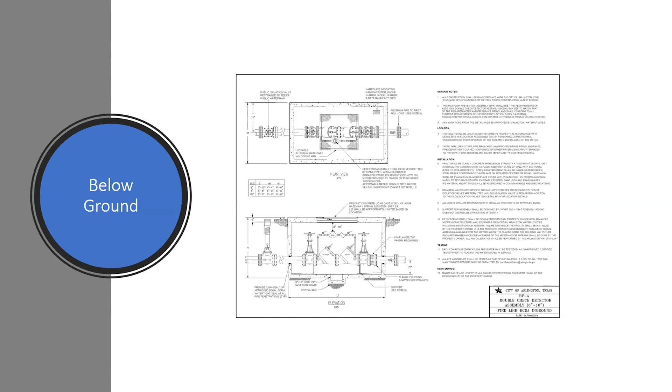So I thought your point of view is interesting because, for most of your new commercial installations, you guys enforce RPZ and above ground. And I see that all across the country. That's one of the big points of my presentation, just about everywhere in the country is going to that. We call it the rise of the RPZ, for several factors, but mainly because it's better protection for your water supply. And you as a municipality, that's your water. You've got to protect it. So I see that just about everywhere.

But like in a lot of cases here in Arlington, we don't know what the end user is going to be of that facility. So it's better to go ahead and have the highest protection that we can to protect our public. Exactly right. The guy who's an office building today, 10 years from now, he's the cyanide manufacturer. So better to just go ahead and put that RPZ in. But I did think it was interesting that you do allow vaults, but like you said, mostly for fire protection. So you're having double checks and double detectors going in vaults.

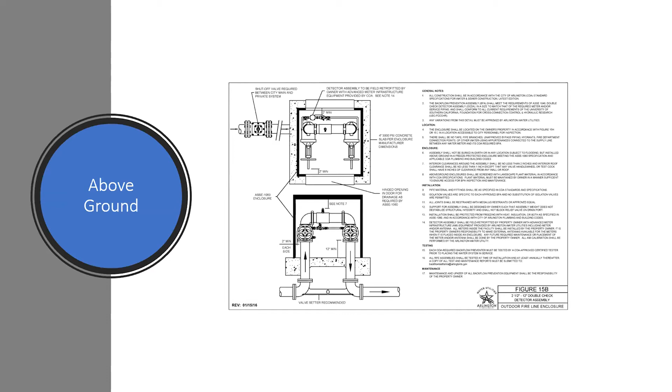In both fire and irrigation, the state deems that as a low hazard protection. So that's why we're still doing those double checks. Of course, if there's any chemical added, then it would be an RPZ required. Gotcha. That's also an interesting point because it's kind of rare to have irrigation considered low hazard. But anyway, that's interesting stuff.

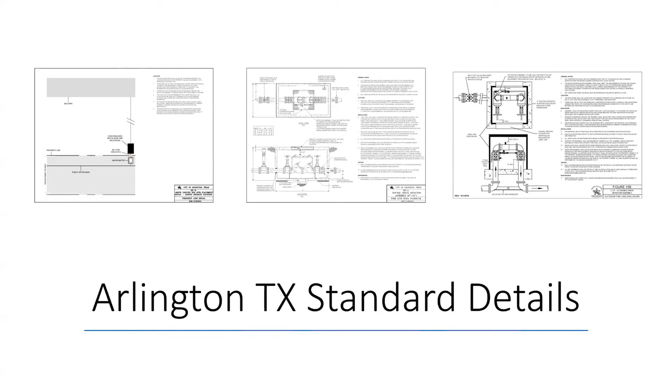Christopher, what's kind of going on there in Virginia? Similar standards? Very much so, yeah. Typically in Virginia, we have the high health hazard, which is going to require the RP. Low hazard, of course, you can allow a double check. And if it is a double check, that's the only one allowed below grade. So in the 3, domestic, fire, and irrigation, for your domestic, there's some jurisdictions that will allow a double check on a domestic line.

There are some jurisdictions that are pretty much reduced pressure RP assemblies across the board, with a few situations where they will allow you to go back to a double check, in the case of a fire system. Of course, lawn irrigation is high health, so it's going to require an RP or a pressure vacuum breaker. And of course, neither of those can go in vaults.

So in short, if you've got a vault, you should have a double check or a double detector only. And those are typically going to be 90% fire. I have a few in some of the municipalities that are wash downs that they've allocated as low hazard, and so they've got double checks in the pits. Gotcha.

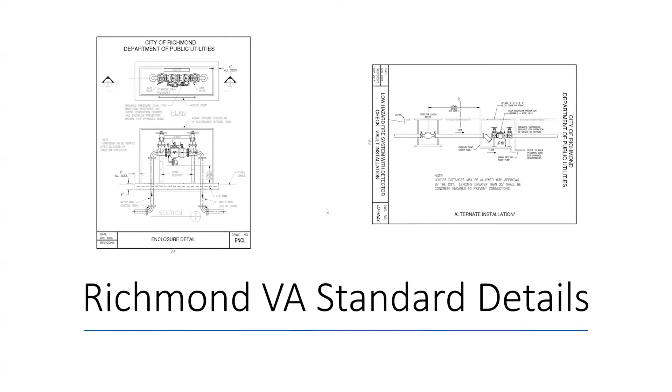One rule is that I do not go into vaults by myself. Not that I have to have somebody else in the vault with me, but I'm not going to be on station by myself. So that requires me to have an additional employee with me or a member of the property, whether it be an engineer or a municipality utility worker or whatever the case is. Gotcha.

First of all, we inspect all of them, and I'll tell you, my experience is all vaults flood, and there are very few of them that I get to that we don't have to pump out. The picture you're showing here is a prime example, and I don't pump water. That's not part of my job as a backflow tester. So the owner or the municipality or whoever I'm doing the work for has got to have a crew there. They've got to have a submersible pump and be able to pump it down to where I can get down there. I'm not afraid of standing in water by any means, but I'm not standing in knee-deep water to test a backflow.

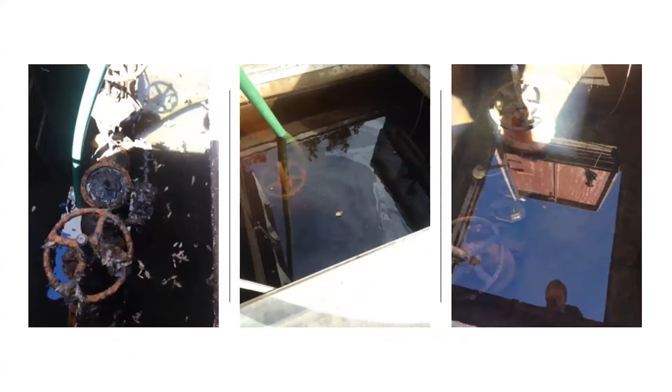And of course, with that is additional cost. Your test costs are going to be higher. It's going to cost you more for me to come out and test one in a vault, especially if it's flooded, than it will to test one above ground. We've got to have the assets. We've got to have a pump. We've got to have a crew. We've got to pump it out. Then I'm going to get down there. Of course, I'm usually standing there waiting for it to get pumped out, and you're going to typically pay me for my time. So it will generally cost a little bit more for me to test a vault than it does to test anything above ground.

And then hazard-wise, you've got your slips and falls, your vaults that have been dirty, wet. They've got scum on the steps. Of course, you've got critters. Don't forget your critters. Always spiders. You've got to love your critters.

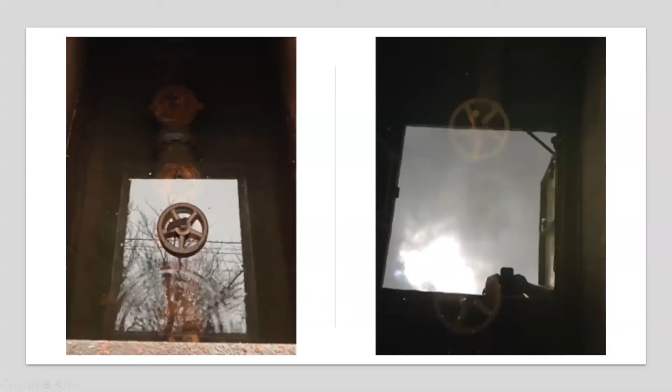And not even to get into the argument of confined space entry or permit entry. That keeps coming up. None of the jurisdictions that I work in here in Virginia have permit-required entry for their vaults. A lot of them aren't really sure whether they should be permit entry required or not. Of course, they are confined spaces. There's no question. By the definition in OSHA, they definitely are confined spaces.

But there again, when I open them up, I take my time. We don't use sniffers or anything like that, but I do open them up and give time for the critters to move around. If we've got to pump them out, we wait to get them pumped down. And then when you're going in and out of them, you just have to be careful. And unfortunately, I don't get around as good as I used to. None of us do. Yeah, so it's a little bit more of a task some days. Some days the knees don't work as good as others, and so you're dealing with that.

So again, it's maintenance-wise, cost-wise. If somebody were to sit down and run some numbers, you could probably start to see over the lifetime of a vault where you could definitely have a return on investment by having it above ground and in an enclosure.

Again, I got 2 utility guys with me pumping the vaults out. I'm standing there. I do charge my customers more because I know I can't show up and just test one in 10 minutes. It's going to take a while. So the cost, and of course, by the pictures you're showing here, everybody knows the ball valves degrade, the valve handles degrade when these things are exposed.

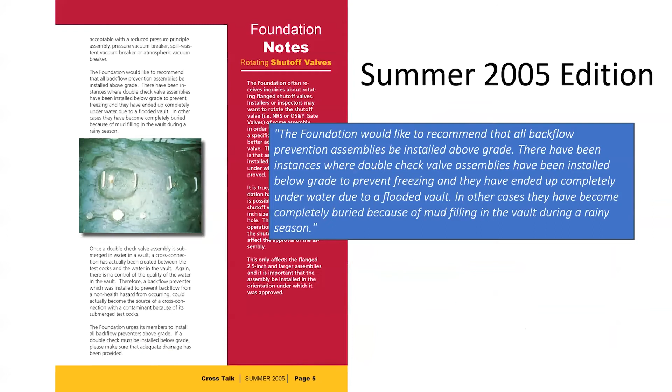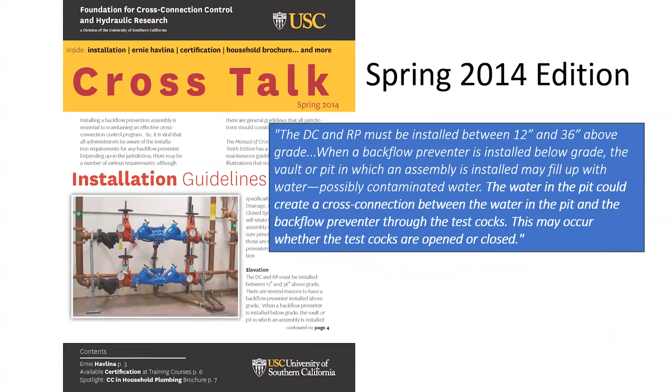University of Southern California dictates that if the test cocks are submerged, that's considered a cross connection, whether they're open or closed. So you look at those pictures, and you've got basically 4 cross connections every time the water gets at or above the test cock locations. So I'm looking at those pictures, and I could count 4 cross connections. And if we go back to the Safe Drinking Water Act, the EPA states that we shall not have cross connections. So that's kind of my take on the vaults.

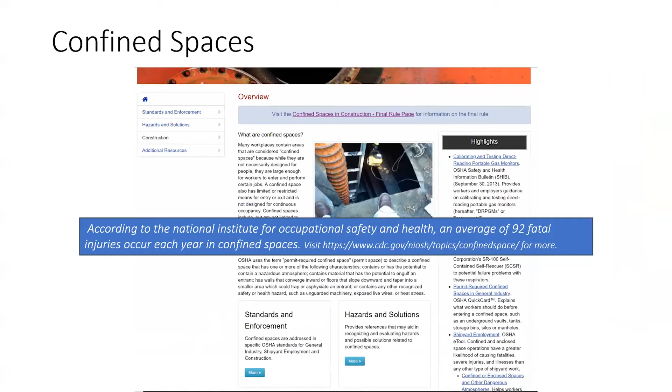Very good info. We appreciate that, Chris. Like you said, OSHA does classify it as a confined space. So if you were following all the OSHA confined space rules, you would have to have a sniffer and an extra person and a tripod and all those other things that OSHA requires. I was down at the ABPA convention a couple weeks ago down in Orlando and talked to a guy named Jeff Smith. And all he does is sell confined space safety equipment. That's it.

And his 4 main precautions when entering a confined space are gas detection, fall protection, ventilation, and communication. So you got to have something for all of those 4 things before you even think about getting down in there. So to your point, it costs a lot more to maintain a backflow installed in a vault. So good stuff, Chris. Appreciate it.

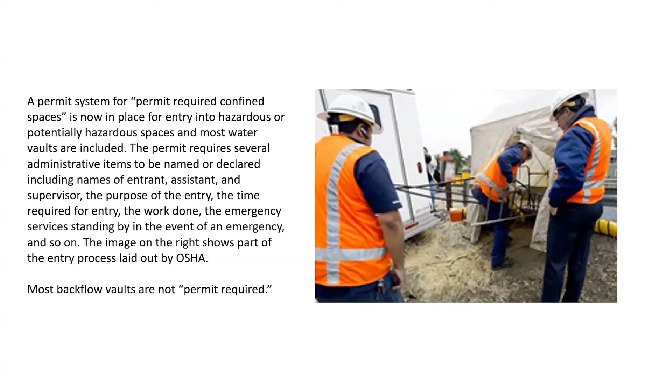We'll keep moving on. I wanted to direct a question to Sean at IAPMO. He's got a long history in this business as well. We kind of talked briefly about high hazard and low hazard applications. That's been language that I've heard my whole 20 plus years in this business. And I know everyone on the call is familiar with backflow, knows about high hazard and low hazard. But I wanted to get a historical perspective on that. Where did that kind of language come from?

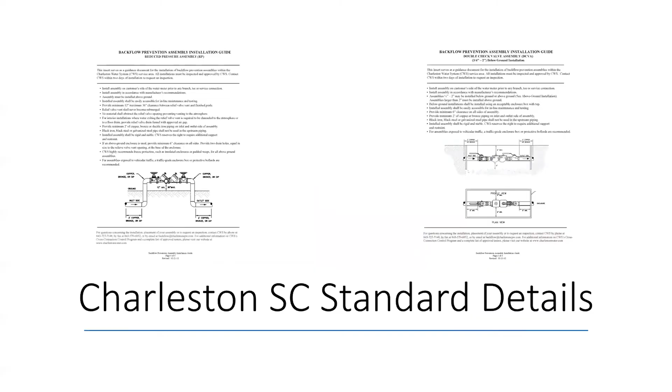Well, the language has been around in the codes for quite a while. We have 3 model plumbing codes in use in the United States, which would be the Uniform Plumbing Code that IAPMO writes, the International Plumbing Code that the ICC, the International Code Council, writes, and then the National Standard Plumbing Code, which is really only used in a little bit of Maryland and the state of New Jersey. But all of them recognize the high and low hazard classifications.

The low classification is something that will only affect the aesthetic quality of the water. And then the high hazard is anything that can make anyone sick or, God forbid, cause an illness to the point of death. So all of the codes have a standard written right into them that lays out which valves are used in which situations. One of the discussions you were having before was about irrigation systems. Irrigation systems are always high hazard because of the chemicals and everything else that people put on their lawns. So all 3 of the model plumbing codes, no matter where you live, are very clear that that would be a high hazard situation because a backflow incident could cause illness or death.

Now that language has been written into the code since the late 90s, early 2000s. So they've been through a number of code cycles where it's been made very clear there is a definite difference between high hazard and low hazard. And the code allows you to pick the valve that you need for the proper situation. We know that buildings can change usage, but the way the code looks at it isn't that everything commercial gets an RP and everything residential doesn't need anything. They're looking for specific usage and then the specific protection that's needed.

Because if you don't need an RP, you don't need that pressure drop, you don't need the issues we have with relief valve capacity and all those other things. So those are some different things to take a look at. The codes, when it comes to the actual vault installations, are very clear.

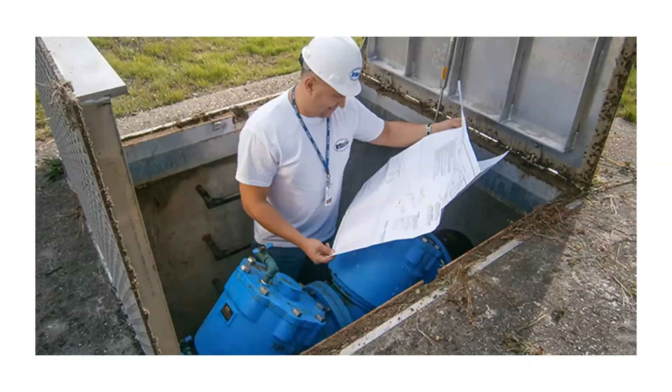You can't put a valve that has a relief valve or has an air inlet valve below grade. You can't put it anywhere where it could be submerged. Even if you go with this drain to daylight part, the ICC, the International Plumbing Code, says for accessibility we have to go with manufacturer's instructions. And Watts and Wilkins and Apollo are very clear that we don't put valves in pits or vaults. We don't put valves in there that have inlets. So that is pretty well taken care of. And because of the drainage capacity, it's something we really have to think about.

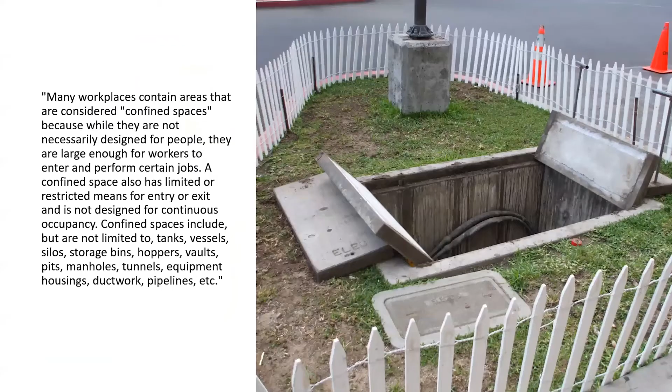Just about every picture that you've shown so far in this presentation is a permit required confined space. So it's crazy not to do air monitoring or harnesses or lifts or all those kinds of things when you're going into a confined space like that. You have no idea about algae blooms or anything else that could happen with toxic fumes in there. And we've had too many fatalities over the years in the industry as a result of issues like that. So it is important to understand that.

I agree with some of your other panelists who said it's more economically feasible for someone to put a valve in an enclosure because of the testing requirements and the safety requirements and the code compliance that you have with putting things in pits and vaults.

Excellent point. Yeah, I kind of started in the rep business, where you're talking to everybody all during the day. And as an inside sales guy at a rep firm, I would get calls from municipalities and engineers all the time saying, which backflow does this application need? Is this high hazard or low hazard? And I'm like, I don't know. I'm an inside sales guy. I've been here three months. I'm not qualified to answer that question.

Yeah, and like I said, in all honesty, there's a table in each of the three model plumbing codes that lists the hazards, lists the type of backflow, lists the protection that's required, and you can go right down it. Now, certain jurisdictions might amend the model codes because that's what they're for, but the model plumbing codes do a pretty good job of telling you what belongs where and how it should be installed. Okay.

That's good stuff. Okay, let's go back to Joe, since you're the municipal guy. Knowing the hazards and dangers of vaults, you and I have discussed those before. It's one of the reasons why your standard details are so clear on above ground installation. But do you think there's any time in the future where vaults would be outlawed or not allowed?

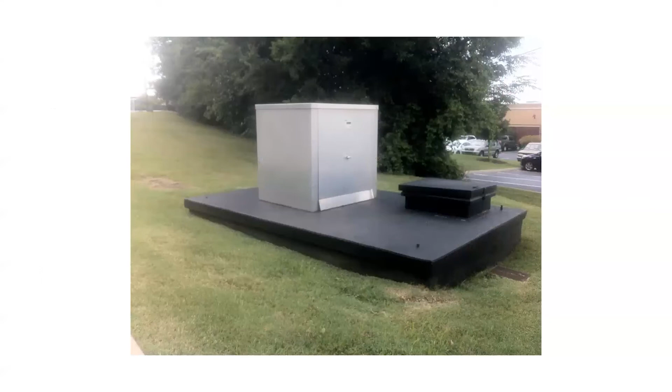If it ever goes to a high hazard status, obviously, then that would be the case for sure. Same thing kind of pertains to fire sprinkler systems and then irrigation as well. And that's kind of under review right now by the state, whether or not our irrigation systems will be deemed a high health hazard. And then that would trigger retrofits, obviously, to go in and start putting in above ground enclosures. If that happens, then I would say yes. Usually it's coming from higher up than the local authority.

Right. And it's just kind of an opinion question. I'm from the South, in Georgia, it's very common for vaults. I know in Texas, it's definitely the norm. Pretty much in the Sun Belt, they put them in vaults. So it's definitely a hard habit to break. Whether that's ever going to happen, certainly we want to educate and tell people the dangers and the requirements and the hazards the best we can. And hopefully knowledge will win out. That's pretty much our philosophy.